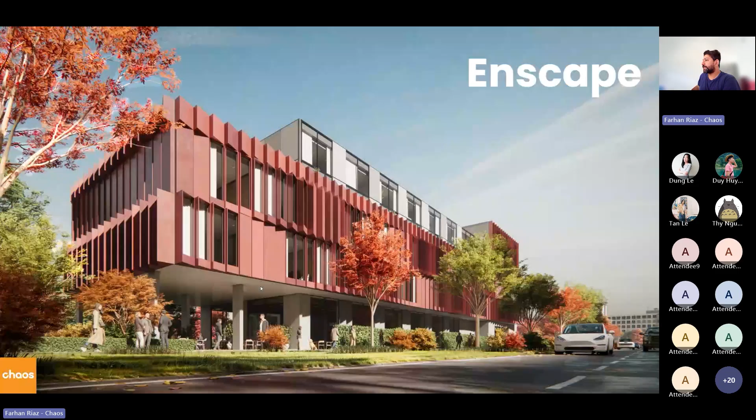So let's start. We already know what Enscape is: it's your real-time design companion. It works with all the popular CAD tools, it's easy to use, it's a plugin, and it has real-time speed. This is how a real-time workflow looks like, where whoever's working in your CAD environment could immediately see that visualization in Enscape.

With the Enscape collection, we bring in the Enscape dashboard, all of these tools, especially Veras that we're going to talk about, as well as Envision. Now, Veras is an AI-powered visualization tool that helps you quickly do a rapid exploration of your design ideas.

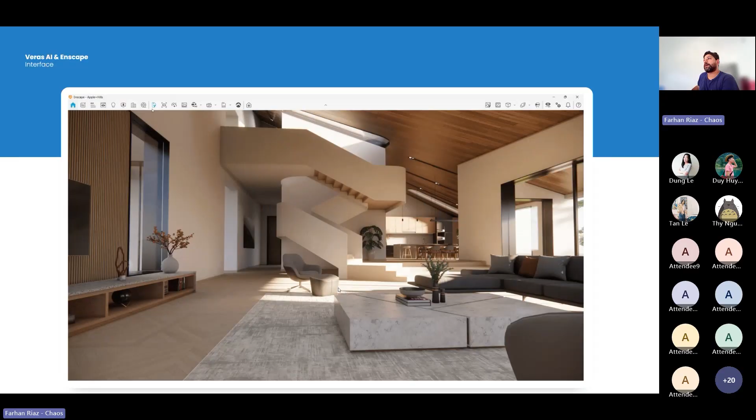Once you go inside of Enscape and click on the Veras tab, this is what you see. You have the option to move around in Enscape, and whatever is your actual view at that moment becomes the base image that Veras uses to prompt on, and then you can keep iterating on it. Now you have different source image options. By default you're using the Enscape view, but you could also use the rendered images you already created with Veras and go forward with further editing them.

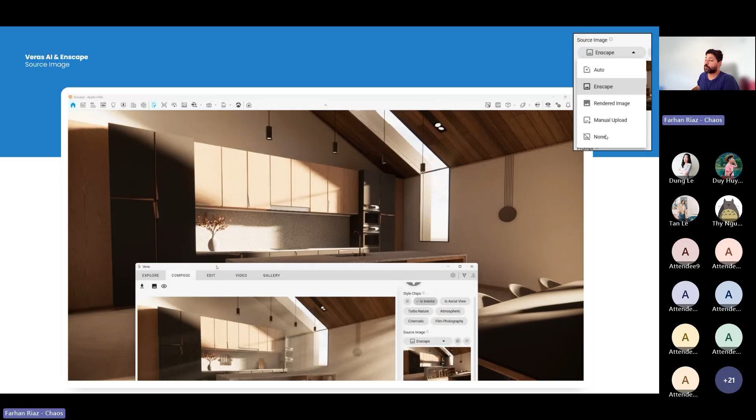Or you could also do a manual upload, which could be an image outside of your CAD, maybe a render you saved before that you want to work on. You could bring it directly inside of Veras in Enscape as a manual upload and keep working on it. You also have the option of none, which basically means you are doing text to image, if you need to do a special workflow where you need to generate something completely new.

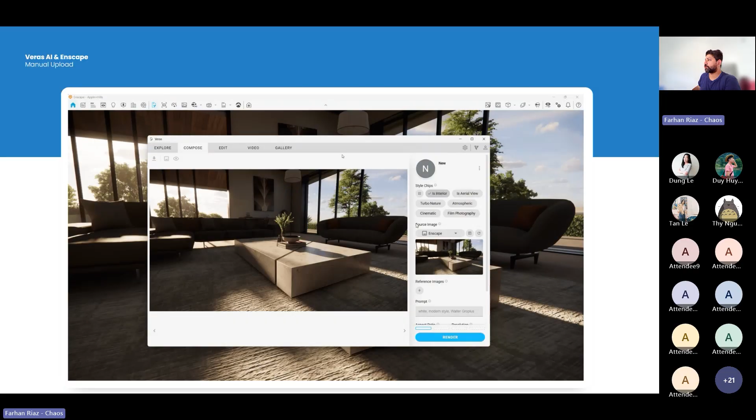We'll start with the manual upload. This is similar to how the web version works, where you just upload an image and start working on it, but now you could do it directly inside of Enscape. You click on the Veras button, choose the source as manual upload, and then drag or drop an image directly here, as you see, and it's going to show that base image, and then you could directly start prompting on it.

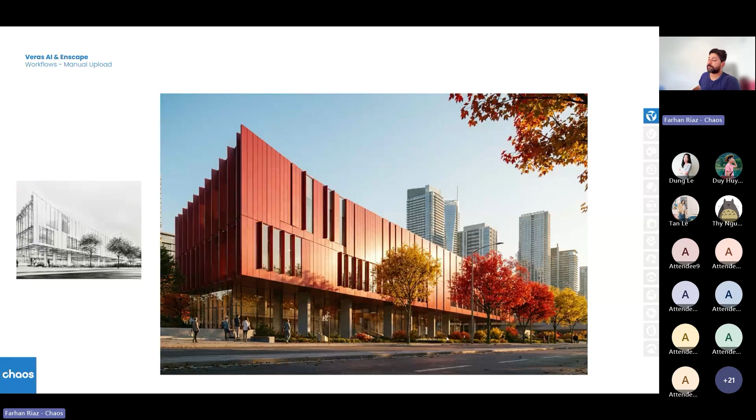Now there are different ways to use it. Whenever you start an architectural project, you might of course want to start with a sketch of your initial ideas, and that's what you could do here. You bring in a sketch to Veras, and then ask it to show how that idea could look like as a built structure. You give the prompt your ideas of the materials, the surroundings, the atmosphere, and all kinds of details for that specific design vision, and then Veras will show that image to you, how it could actually look like.

It doesn't really limit you in terms of whether it's only a built structure or an interior. It could be any design idea. It could be about form, it could be about geometry, it could be just about materials. You can test anything using Veras.

Now, Veras comes with a number of presets. These are templates that you could use immediately to quickly generate something and have a quick idea of how this could look. This could be an illustrative look, this could be something like a physical model, or it could be something very, very real where you see the realistic aspect of a built structure.

But what's important here is to understand that when you compose or generate an image, whatever prompt you give, if you like the result, you could save it as a preset and then use it for other projects as well, or even the same one. So here I have some Veras presets that come with it, but I also have my own presets, where everything I create as my own preset gets saved here, and I could always come back to it.

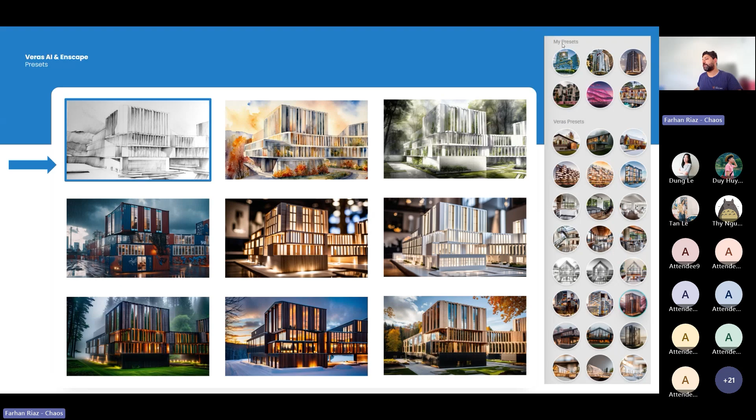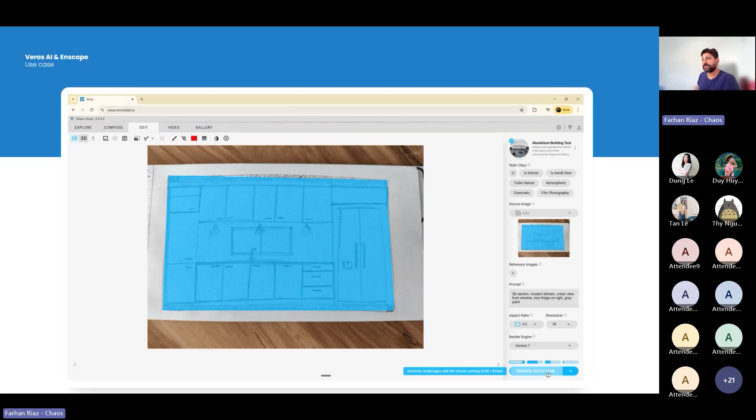So once I drop an image in the manual upload, I can select an area for the sketch and then write a prompt saying I want to see these materials, that's the object. And in a matter of seconds, Veras is going to generate at least 4 simultaneous options, and you could see different results and better understand how your design could look like.

Veras now comes with Nano Banana Pro, Nano Banana 2. Previously, we had Stable Diffusion, so everything under version 6 is Stable Diffusion. And from version 7 onwards, it's Nano Banana Pro and Nano Banana 2.

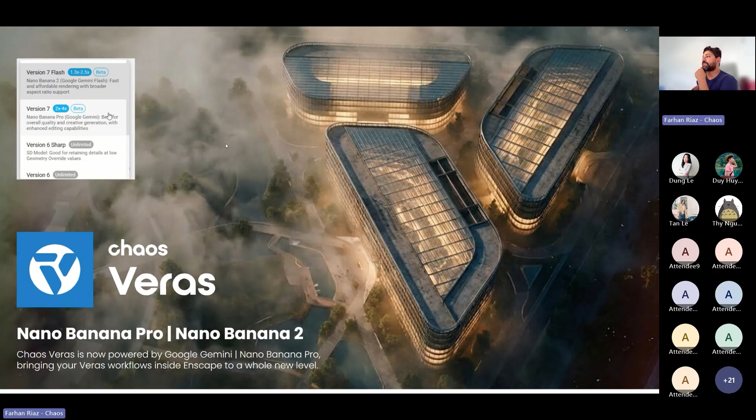This is really different compared to Stable Diffusion in the sense that it understands simple human language. So if I'm ideating and doing different smaller tasks, I could just use a simple single line, where I say something like change the chair, change this texture, or move something in the plan or image. I could do everything like that.

But if you're working in a bit more detail, where you already know what kind of output you're going to need, you can also have a very comprehensive prompt and separate that into different tasks. That's what I did here. I had this floor plan and I wanted to go directly to a visualized view, so what I did was separate different tasks in a single prompt.

I mentioned I want to generate a board to see all the areas as a final visual - the layout, the style, the details, the quality. I think what was really important for me was to provide the constraints that I don't want Veras to change the design. The windows should be where they are, the walls should be where they are - only the visual aspect should change.

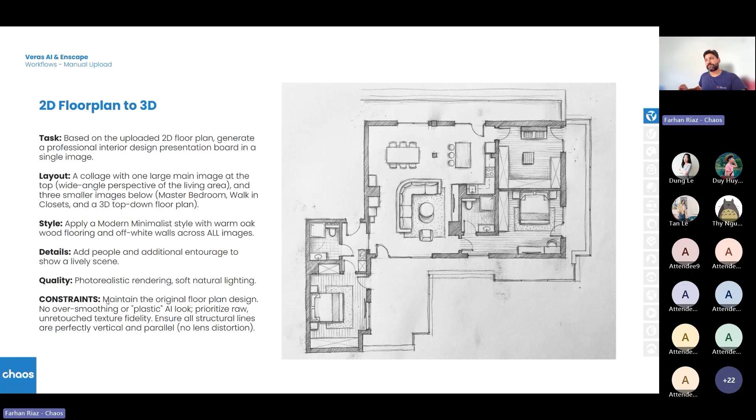And so I went from this floor plan to this in just one prompt. I'm able to immediately see how the space could look or feel and have a better understanding of how or where the design is heading.

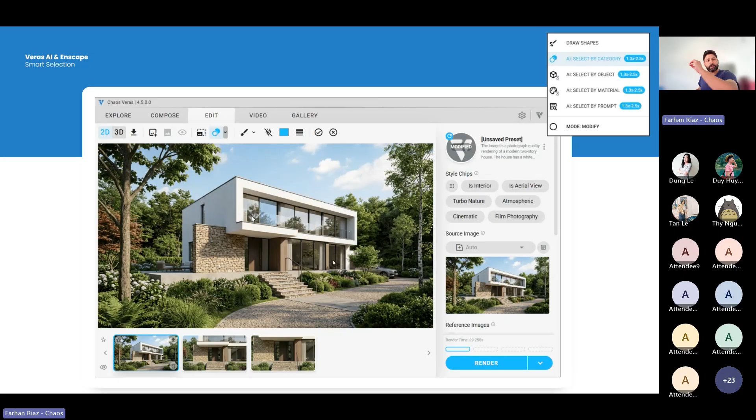Veras also has the option to segment a 2D image. That means you could segment it by different categories, different objects, and then select those different parts and prompt directly on them. You could also remove the background, and you can rotate a 2D image to see a different angle of it without having to go into 3D.

Then we have the other source, which is directly the Enscape model. This is really powerful because when you typically use AI, you have a flat image that you start with. Of course, you have options to segment it through AI, but it's not in your 3D environment. With the Enscape model, it's different - it understands the object ID, the material ID, all these depth channels. So it really understands the 3D organization, depending on how you separated it in your CAD program - Revit, SketchUp, Rhino, whatever you're using. You could pick those objects or material surfaces individually and prompt directly on them.

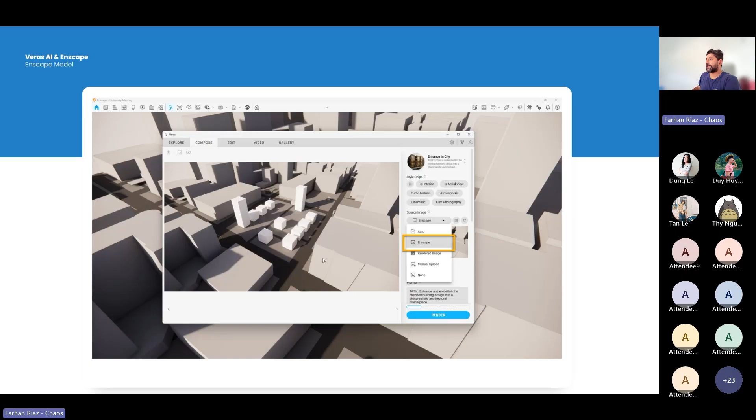Here's a first example where I changed the source to Enscape. Let's say I'm really in the early conceptual stages and I just have a volumetric form, much before I go into 3D detailing. I could ask Veras to show me how this design would look. In the prompt, I could say I want to see a university campus, with this and this in the surrounding, and these are the materials, and it will immediately show me how my idea could look.

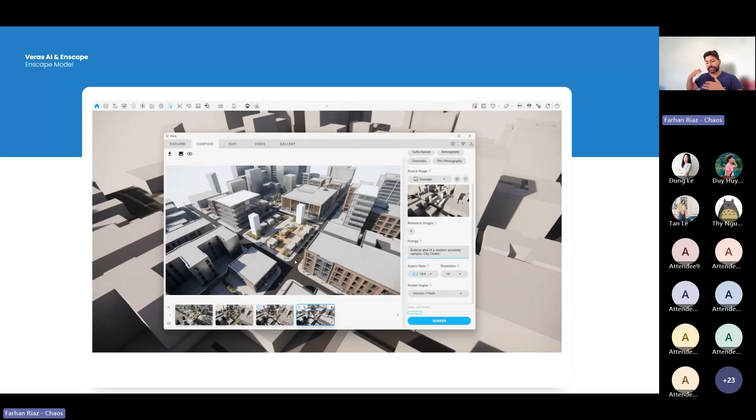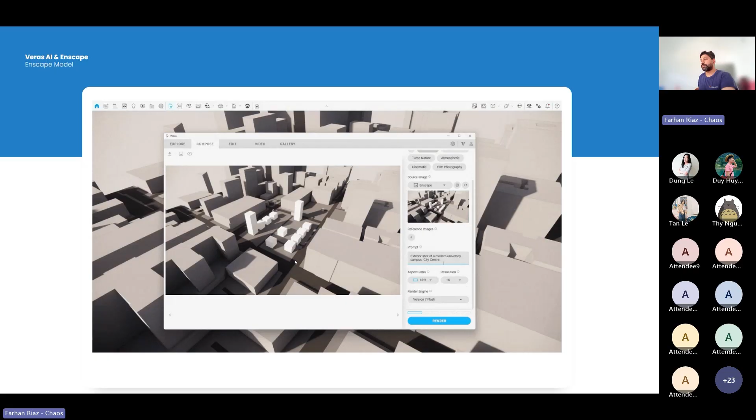So if there are some smaller or bigger decisions that I need to consider now before I spend so much time detailing that model, I'm able to make those decisions now. It really saves me a lot of time, and I can understand the design direction much better in the conceptual phase.

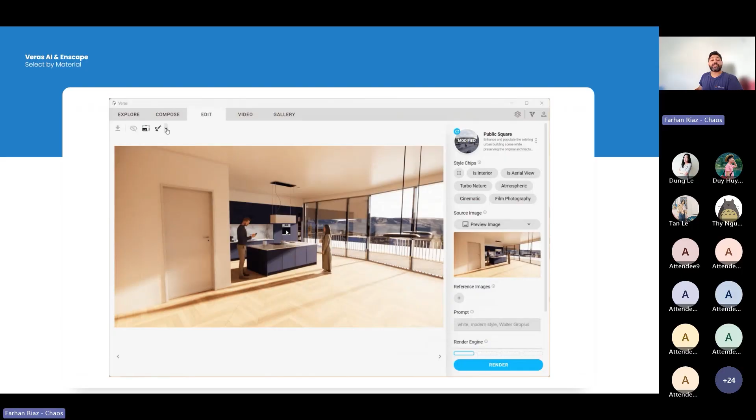But when I say it understands 3D arrangement, what I mean is you could select by material. These are the material surfaces inside your CAD, but Veras can pick them up directly, and I can say hey, change or replace this material with black ceramic tiles, for example, and it's going to change that for me. Once I click render here, you'll see it immediately creates a black ceramic tile texture.

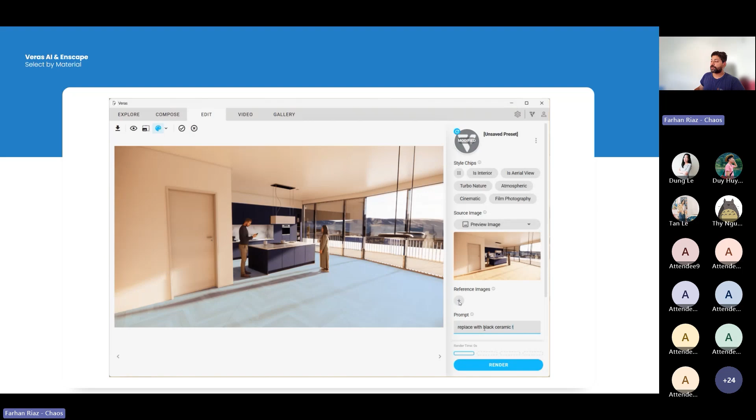Now, generally, this is exactly what I asked for, and I like the results, but there could be a scenario where even though you like the results, you maybe had something else in mind. So what you could do is use the reference image option, where you provide a reference texture or material you actually wanted to use.

It's going to replace that surface with that specific material. The same applies with select by object. So depending on how you separated your objects in your CAD, groups, components, elements, whatever you have, you could pick up these individual elements from your Enscape view. For example, here I pick this kitchen island and say I want to remove it and replace it with a dining table for 6 people, and it's going to do that for me.

And what's really nice about this combination is that it's context aware. So if there are any shadows or reflections spread because of that specific object, they are also going to be updated accordingly for that specific view.

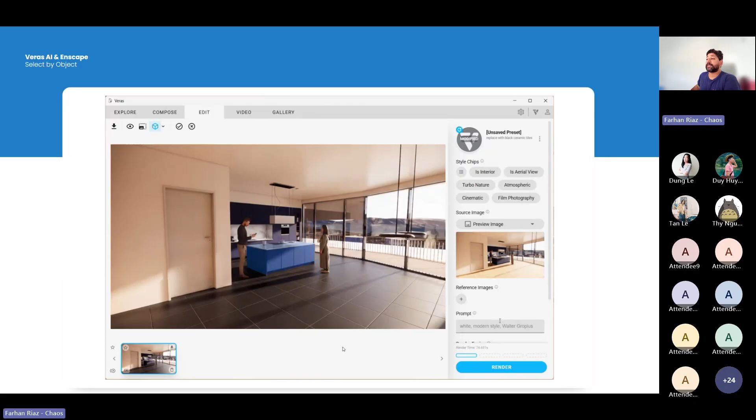And once again, there could be a scenario where you say, I like the results, but I wanted a specific object or model that I don't have a 3D asset for in my CAD software or the Enscape asset library. I could just provide an image from a manufacturer for that object, and Veras places that object directly in the generated image.

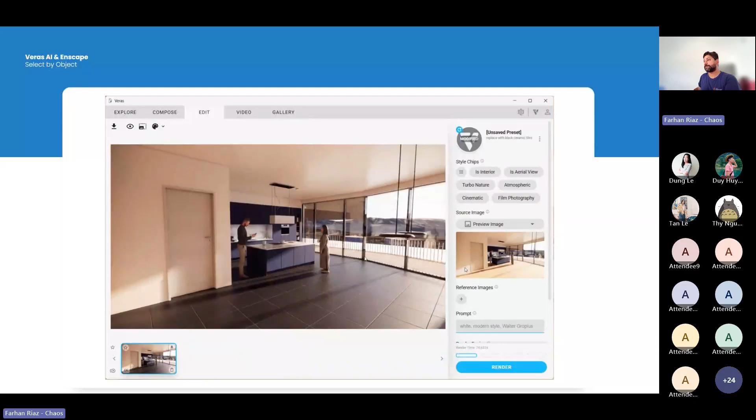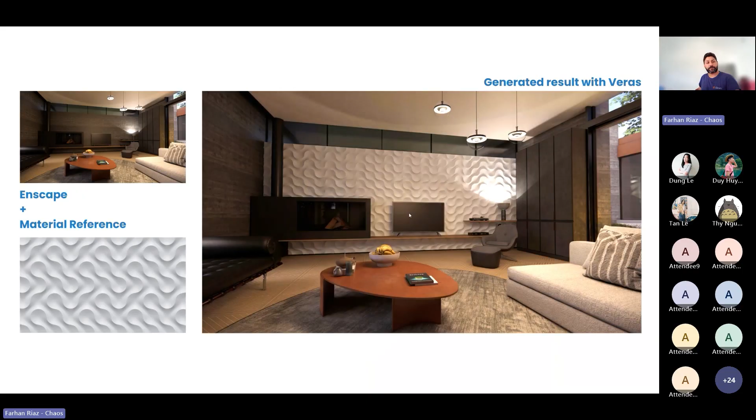So referencing with AI, just like we saw, here's your Enscape view, you provide a material reference, you choose the material surface, and it applies it for you. Same with objects: this is my Enscape view, you provide the image of the object, define the area you want to place it, and it places it for you.

But we also have other options. We have the style reference, the color reference, the design lock, and also a custom reference. Now, the style reference is pretty simple and straightforward.

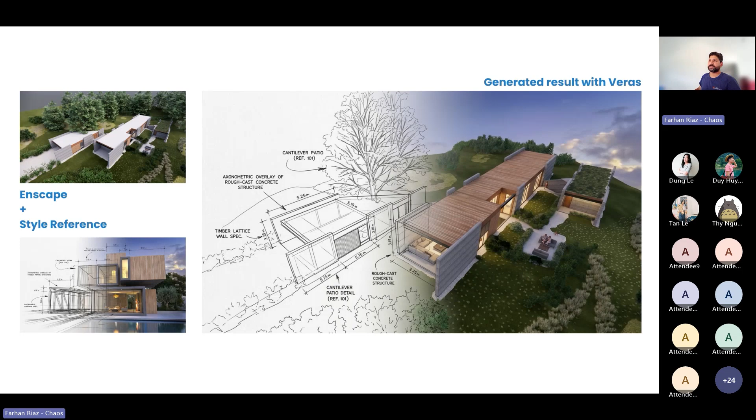This is my Enscape view. I provide a style image where I want half the render to be wireframe, half to be visualized. It uses that style and applies it to your own Enscape model.

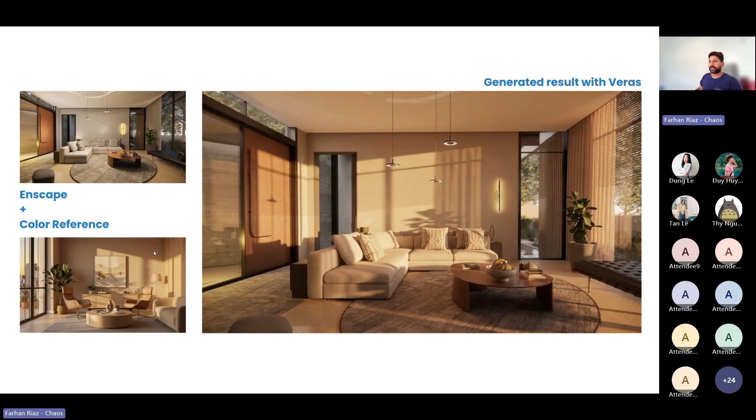Or if I have a color reference, which basically refers to lighting or the atmosphere, I use this Enscape view and provide this color reference and it applied it to my image. And if you see how accurate it is, even the light from the blinds and how it's coming here, the overall mood really brought it to exactly the type of atmosphere I wanted in the reference image.

Custom reference could be used if you're not able to find anything in a specific category that's already defined. You can choose a custom reference where you can design your own referencing style, basically. So I have 2 examples for that.

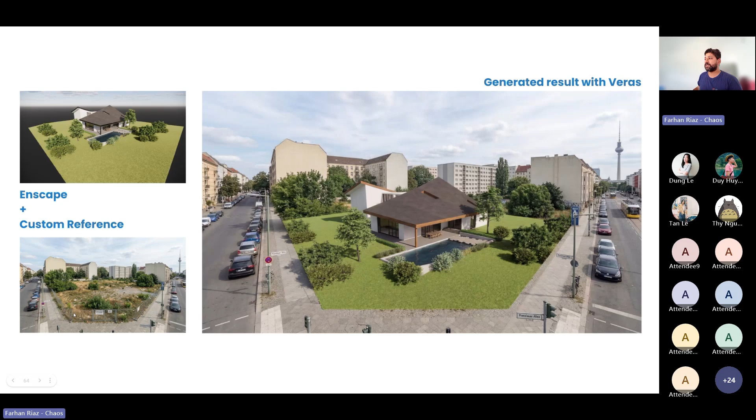The first one is where I had my Enscape model and I said, okay, I have a picture from my site, and I asked Veras to place my model inside this empty lot, and it did that for me.

Another custom reference could be mood boards. This is something I really like and use a lot. This is where, for example, you're in a design phase where you already worked on the Enscape model, you have all the textures in it, but you are talking to your customer or client and they say, okay, we want to finalize the textures, and they're slightly different from what we have been seeing or discussing throughout the design.

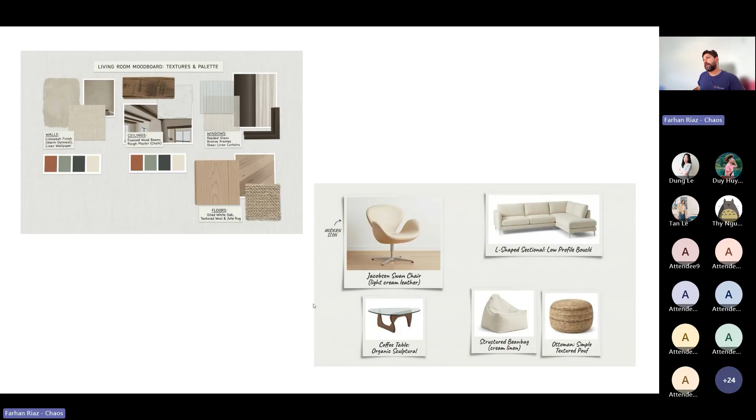But for these, I don't have an Enscape model or a model in my CAD. So I pasted all the images onto another mood board. And then I went to Enscape and changed the visual style to line drawing or sketch mode, where you don't see the textures, just the line. So I don't have to remove them, but I still have a base image where I have the space.

And then I applied the custom reference where I provided the first mood board and asked it to place the textures on this base image. And it immediately did that for me in a single prompt.

And then I provided the second mood board and asked it to place all the objects, and it did that for me. This is really fast, really quick. You could immediately get there from even a hand sketch, for example. But I wanted to test it further.

So I used the video feature in Veras to create a quick video to see how this space would actually feel. I was curious whether, if there's someone walking in the space or interacting with the elements, that would give me a better idea. So I created those, and maybe this is a good point to talk about Veras video.

Veras has a built-in feature where you could generate different length videos, 5 to almost 10-second videos, based on your base image. And you could also provide a start and an ending frame.

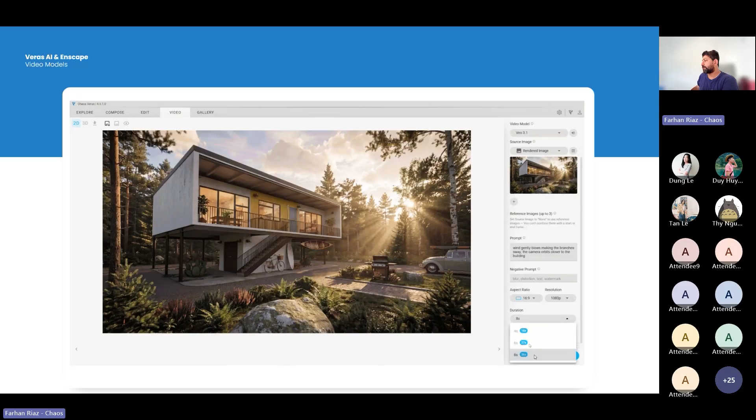Now here you have different models. We recently launched the Veo model as well, where you provide your reference image, which could be the rendered image. Then you define the quality, which could go up to 4K, and the duration. This could also go up to 8 seconds at the moment. In the future, this could be more.

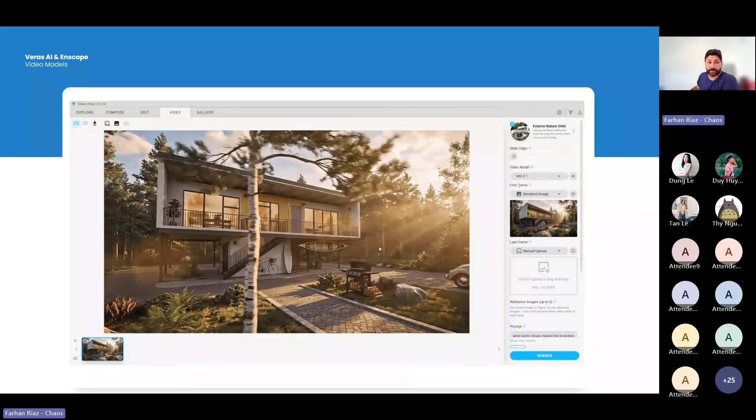So as you see here, I could quickly generate a video, and it shows me the spatial experience of the actual space. Now this could be you animating the objects in your CAD view or your Enscape view.

This could be an empty frame when somebody just enters and interacts with the space. It could also be weather or season changes, movement of some sort, people just sitting and talking, or something very illustrative, where the idea is not really the realistic aspect of it, but more the concept behind the design.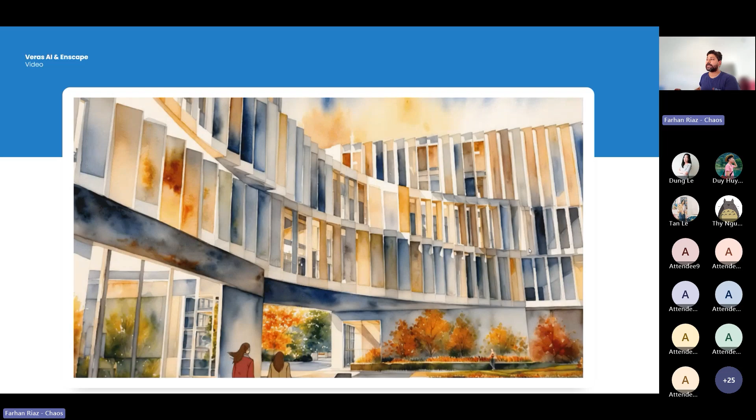We also have a combine feature directly inside Veras. That means you could create a number of videos and then combine them directly inside of Veras.

Now, if you need some sort of continuity, you could always take the last frame of the first video and use it as the first frame for the second video, and keep going forward like this to have a bunch of videos, then combine them directly inside Veras to have a longer video to showcase to your clients or customers.

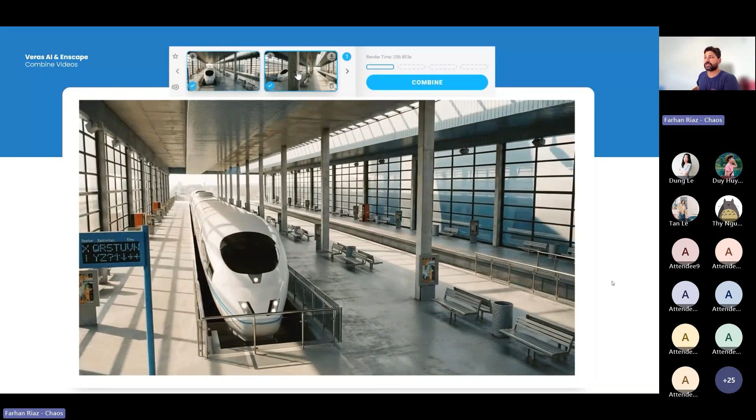Veras also has a gallery. Anything you ever create with Veras is saved in your gallery. You could always come back to it, and you could always push it back to your workspace as well. And you could share it with anyone who has a Veras account, and they will be able to see those images directly inside of their Veras account as well.

Like I said, there's also a web version which uses a manual upload. Just like you manually upload in Enscape, you could just use the web version to upload that. And you have access to your gallery in all of these versions. There are three versions or platforms: the Enscape platform, the web version, and then you also have the CAD version, which is installed as a plugin directly inside your CAD.

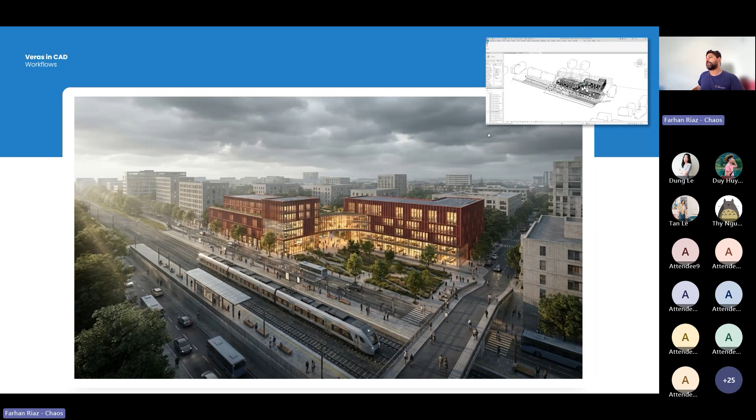So it works for Revit, SketchUp, ArchiCAD, Rhino, Vectorworks, as well as Forma. And in this case, it uses your CAD view. As you see, this is the Revit viewport here. And then you could prompt directly on it and create these beautiful visuals, and ideate and iterate on it.

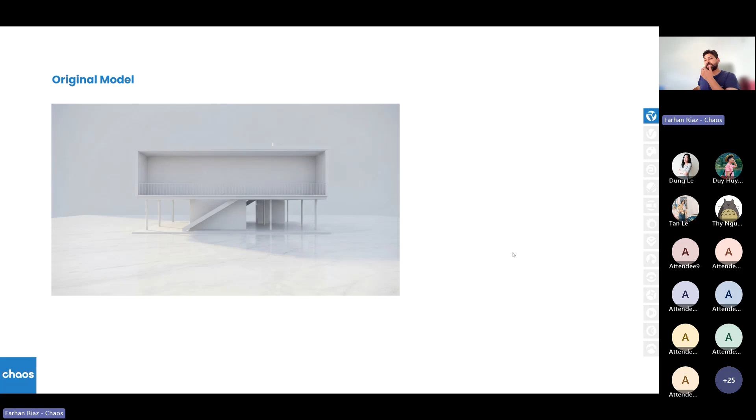Now these are the key features of Veras. There are different workflows on how people use it, but I just wanted to show how it is mapped throughout different design phases. For example, if you're using just your initial idea, which is perhaps a whitewash model, you could start with that. And then you could ask Veras to use that Enscape whitewash model and generate something to quickly ideate and see how it could look.

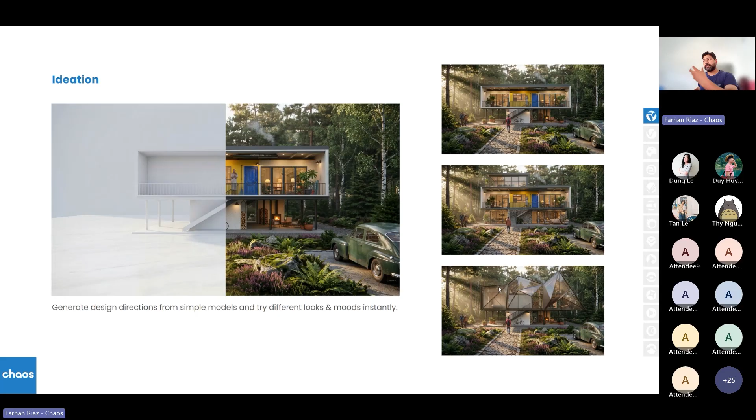And then you could see different ideas. Maybe it's an elevated building, maybe it has 3 floors, or maybe you're testing ideas on the envelope of the building. You could immediately test it using Veras and see how it looks. You could also be in the iteration phase where you already have the design, but the customer or the client asks you to change something.

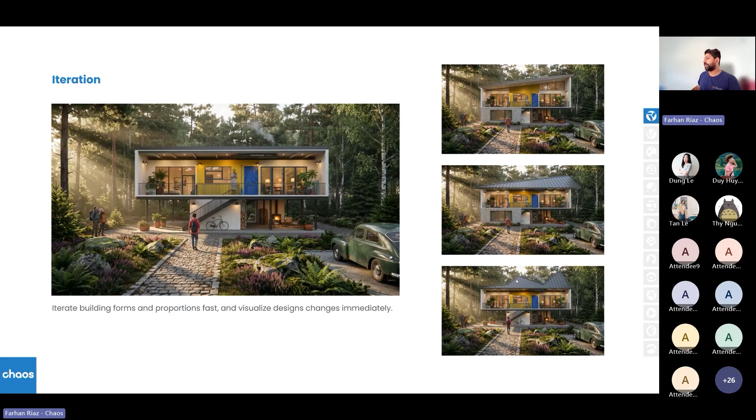For example, in this case, they asked me to change the roof, have some skylights, maybe increase the height. And then I have different options here on testing how the roof could be increased and how different ideas for that could look like.

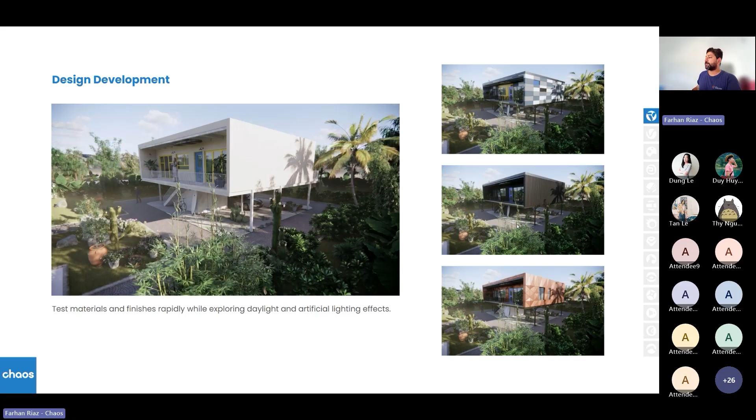In terms of design development, if you are in a very detailed design phase and you want to quickly test something like materials on the facade, and you have these different materials from the manufacturer, in terms of having it discussed with your customer, you could test them using just those textures and applying them through Veras before you actually apply it to your 3D model.

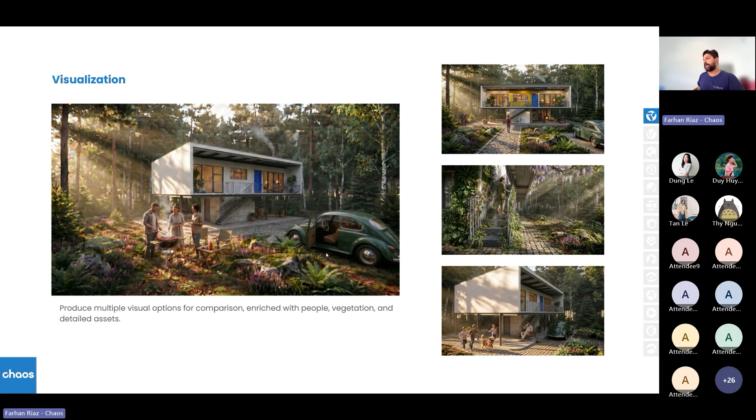And then, of course, visualization itself, you do create everything with Enscape, but some of the aspects that you want to add quickly, maybe it's the background, maybe it's those people, or maybe it's just changing some kind of visual elements like light, you could quickly do that with Veras.

And of course, in post-editing, if you've already done everything and you want to really just enhance your renders, you could do those with Veras as well.

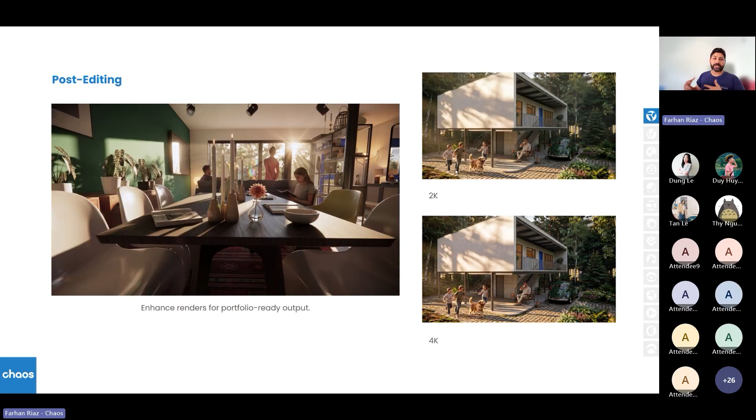You could also change the quality from 2K to 4K. When you were in the testing phase, you were using 2K quality, which you could choose inside of Veras. And then in the final ones, you could go to 4K and make it even higher in quality. So this is how it looks like. You can use it pretty much in every design phase. It depends on what your individual workflow is, but ideation, iteration, design development, visualization, presentation for videos and stuff, and then post editing as well.

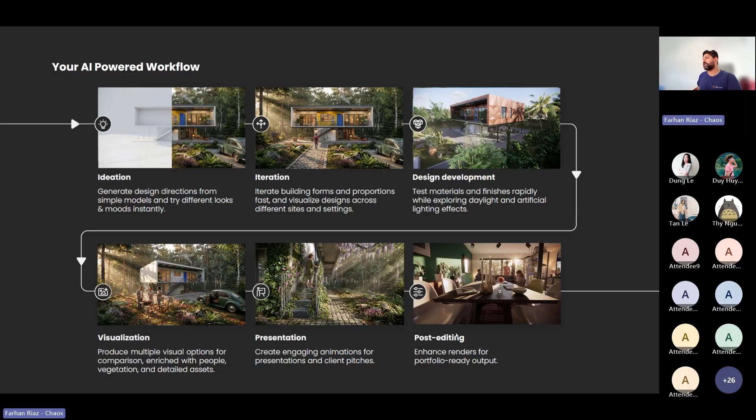I also wanted to highlight a little bit the idea of prompting itself. This is a very much asked question, how to prompt or what is the proper way to prompt. But I think it really depends on what you're trying to achieve. I'll give you a few examples.

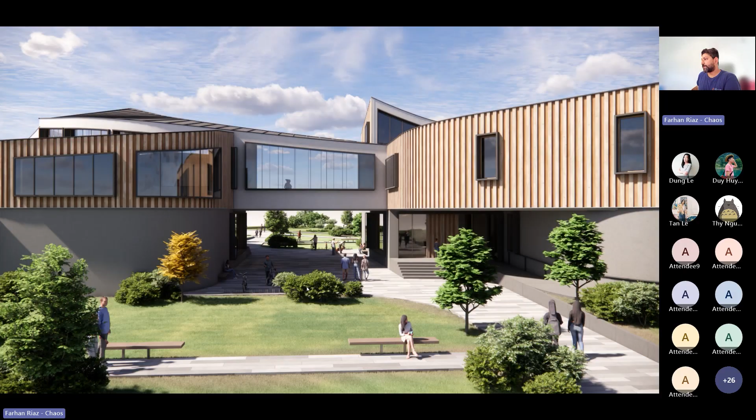So for example, this is my Enscape view, and I say, okay, change the material on the wooden facade to colored vertical strips. And then I give a line break because now I'm talking about something else, and I try to break everything that's a different task, even if it's within the single prompt. And in the second part, I say, okay, add some swings and other outdoor play objects and some kids playing in that green space. Now, I didn't specify which green space I'm talking about. It could be this, it could be that, but I mentioned it. And so based on the information I give, this is what it creates, right?

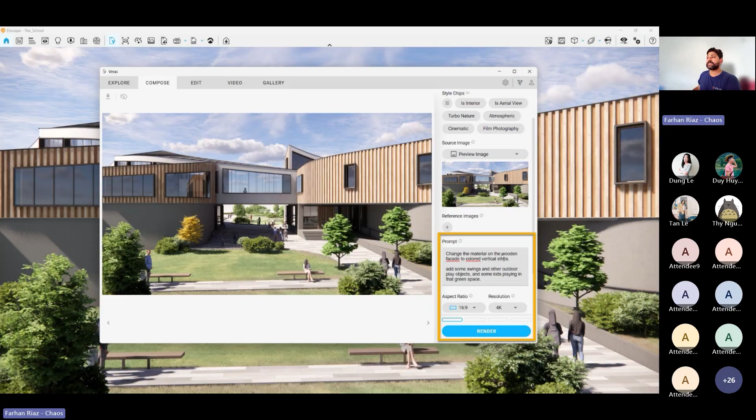I do get the vertical strips on the facade, different colored. I get a play area here, but it didn't add any play areas in the background because I didn't specify which area. But in the second image, you see it provided there as well. It understood that maybe it has to do both of these as well. And so in the third as well.

Now, I really think of prompting as somebody who's working with you. So for example, if you're working in an office and you are working on a design, but you want to hand it over to a colleague to do something for you. So AI is for me that colleague, and they will do exactly based on what information you provide. So if I'm able to explain to my colleague that, this is what you have to do, that's how you should treat prompting, where you have to explain exactly what you want it to do. And based on that information, it's going to do that for you.

Because I think most of the times we miss important key information within the prompt. And then we look at the results and we're like, hey, that's missing, or this should have been like this. That's always, or mostly I would say, because of the information that you provide.

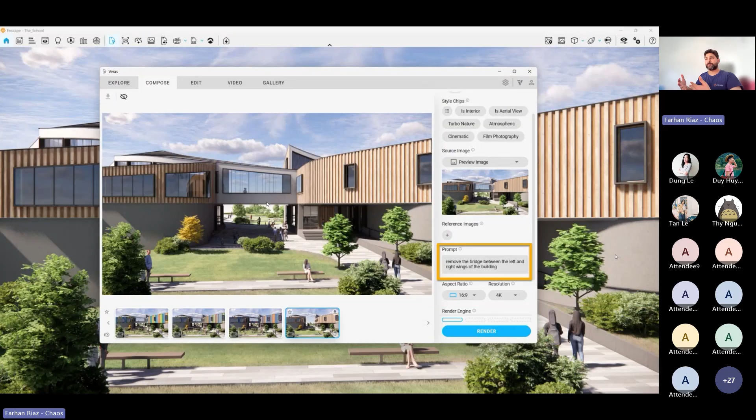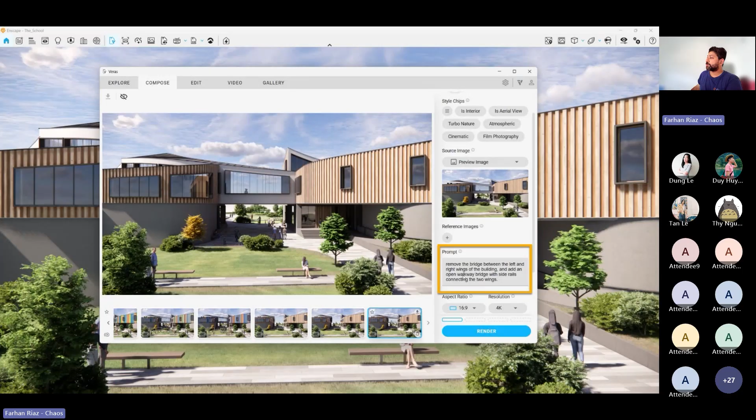I don't have to mark any specific area. I just specify in the prompt what I want to do, and because of the clarity in the prompt, it does the same for me without me having to mark an area. So I'm emphasizing that it depends on what information you give and how clear it is. Then I wanted to go a bit further and challenge myself to see how prompting is working. So I said, remove the bridge between the left and the right wings of the building and add an open walkway bridge with side rails connecting the two wings. And as you see, it did that for me.

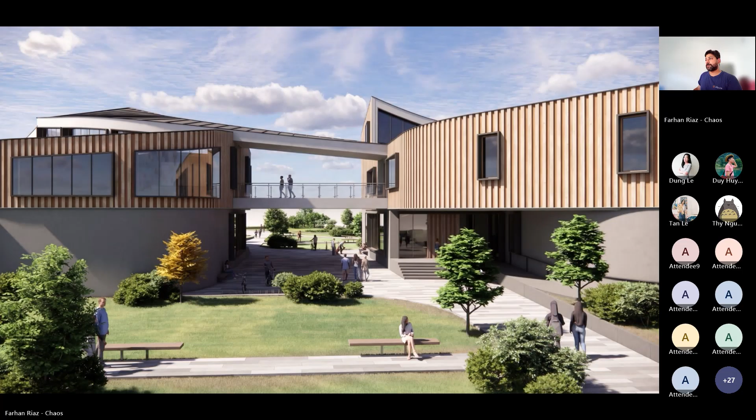Another example could be here. This is my base image, and I say, show the building in winter. Now that's the only information I gave. It really depends on how the AI interprets winter, and based on that information, it generates this image here. This is how it interpreted winter, which is fair enough. It has everything that could be defined as winter. You have the snow, you have the trees with sort of a wintry look and everything.

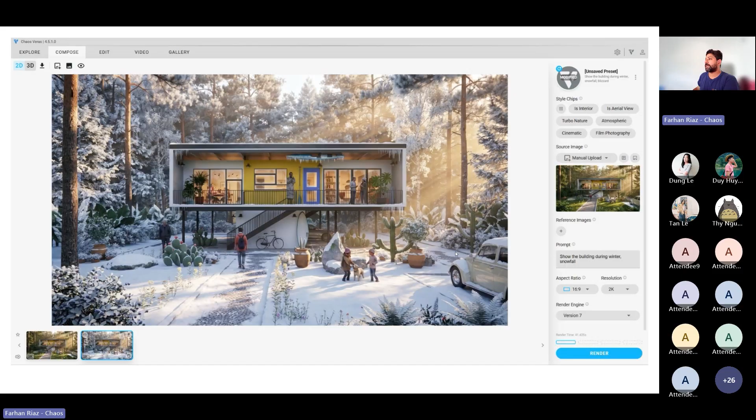But in the next prompt, I said, show the building during winter and snowfall as well. I added snowfall as a new keyword, and then it added snowfall as well. Then I said, show the building during winter, snowfall, and blizzard. In the next image, you see now it's a heavy blizzard, snowfall, and people are trying to save themselves from it. So that's what the image reflects. It really depends on what information you're giving, and that's how prompting works.

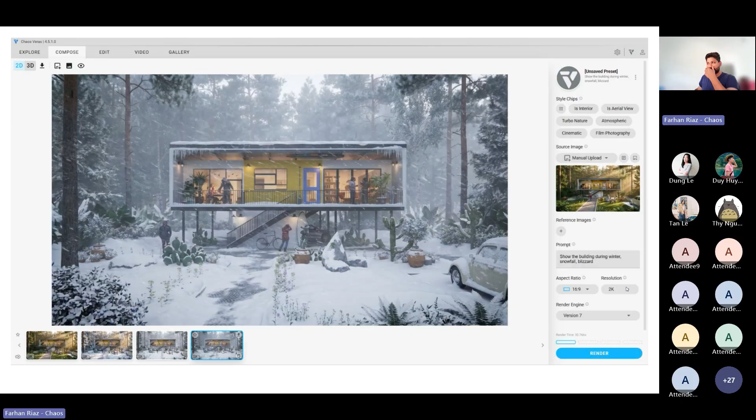This is more for, let's say, ideation, where you're still testing ideas. That's when I would go step by step, doing one part of the task, using that image, and then doing another part, continuing forward. In this case I'd probably use a lower resolution because I haven't reached my final image or visual. But if I already know what I want to achieve, for example in this case, I already knew what kind of visual I wanted to create.

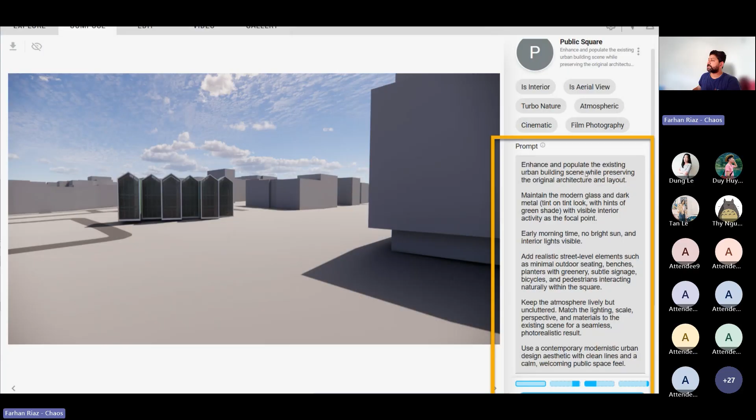So instead of going step by step with smaller prompts, I designed a very detailed prompt where I added all kinds of details in terms of what the building looks like, what the materials are, what's the time of day, what's happening in the surroundings. Based on that, I went from a single prompt to this. Then I would change a few words here and there to see different scenarios and understand how I could use that public square or how it looks in different weather.

Inside of Veras, like I said before, we have these presets, and some of these presets are basically templates for you to use. You might see this sort of structure where you have a main task, the option to enter style and art direction, components of your design, where you talk about what the main subject should be, what the setting should be, what kind of details there should be, lighting, color, and then constraints, of course. I use it a lot. In terms of constraints, this is a perfect example where I say just maintain the original design, and it maintains it for me.

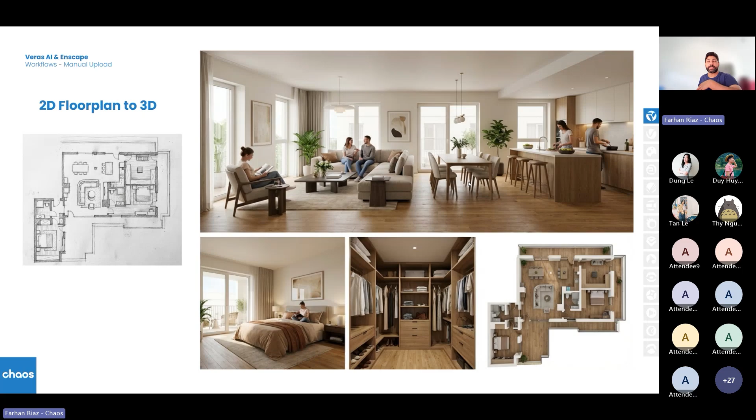So this is how it's working, and Veras works with every language. If you're using it in your own language, it's going to give you the same results as it might give you in English, French, or any other language you want to use.

Before coming towards the end of the Veras part, I wanted to talk about common pitfalls and how to avoid them. First, as we saw already, is having vague prompts. The more specific you are in your prompt, the better results you get.

You also need to differentiate between ideation and iteration. Are you ideating and testing ideas, or are you iterating because you've already chosen an idea and are working towards the final image? That also defines how you treat the prompt and how you reach a final image.

Consistency - you could lose it. If you've worked with different AI platforms before, you might notice that if you generate an image for a space from one view, and then generate another from a different view, the results are really different and look like different projects. This is what the design lock feature does in Veras - once you generate an image and like the results, you could lock the design, then apply the same settings to a different view for the same space and get similar results. So you have consistency in your generated images.

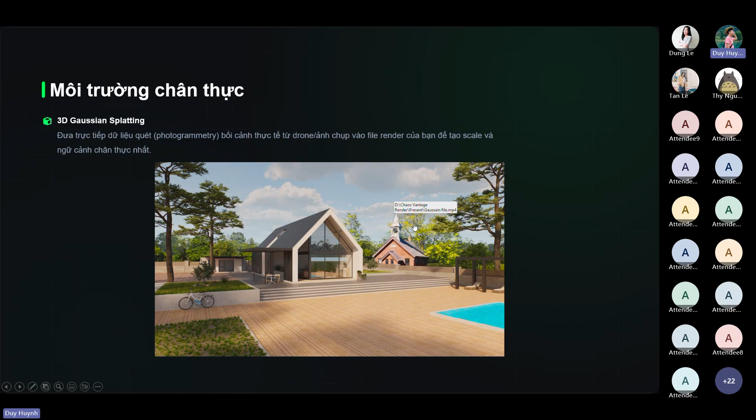Bây giờ mình sẽ cho các anh chị xem. Ví dụ mình có một mô hình 3D được quét như thế này, giống như một cái nhà thờ. Khi được quét 3D rồi, các anh chị thấy là nó bao gồm ánh sáng, vật liệu rất chi tiết như thế này.

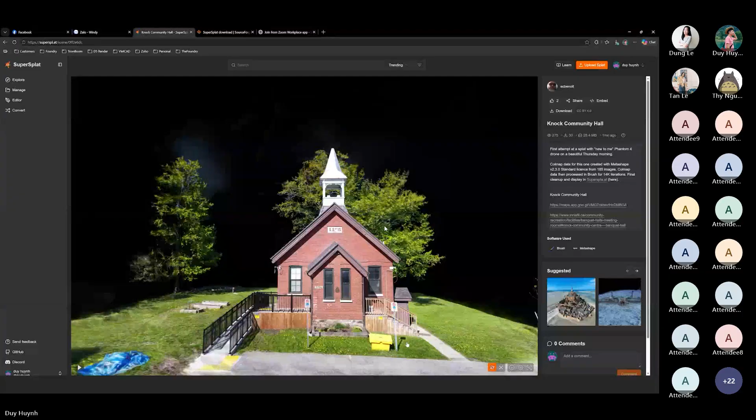Hiện tại Chaos Vantage cho phép chúng ta tạo một vật thể, và vật thể này có thể lấy được dữ liệu Gaussian Splat, và nó có thể lấy được dữ liệu từ file online mà chúng ta download về. Ví dụ như cái nhà thờ hồi nãy, mình download về xong rồi nó cho một file, thì bây giờ chúng ta sẽ mở file đó lên và để vào Chaos Vantage.

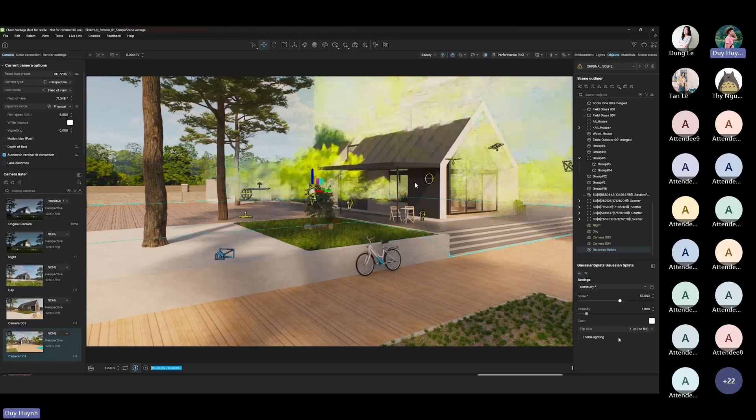Khi để vào, chúng ta có thể điều chỉnh kích thước cũng như vị trí của nó cho phù hợp với đồ án của chúng ta.

Ví dụ mình đặt nó ở vị trí này, là vị trí background thôi, và mình render thử cho anh chị xem. Chúng ta có thể thấy tuy nó là mô hình được quét bằng công nghệ, nhưng khi vào 3D thì nó thể hiện rất chính xác cùng với độ sáng, vật liệu cũng như kết cấu của công trình.

Đây là một phương án giúp chúng ta có thể đưa những vật thể trong môi trường thực tế vào mô hình 3D của chúng ta, mà không cần phải tốn thời gian để mô hình lại nó.

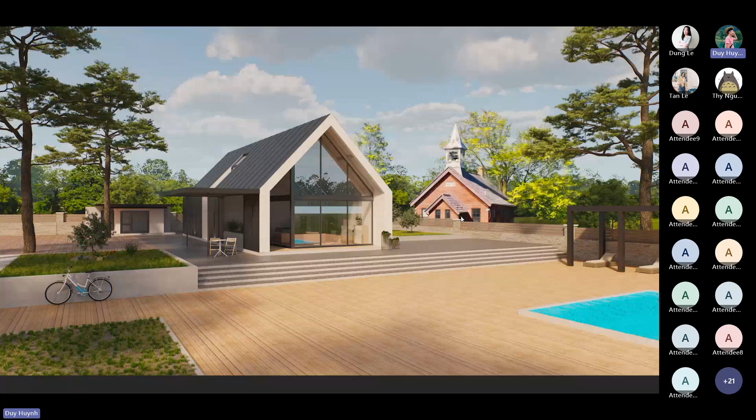Một chức năng tiếp theo là chúng ta có thể làm cho nó thành môi trường bầu trời đêm. Ở những phiên bản trước thì nó không có chức năng này, nhưng ở phiên bản hiện tại thì nó cho phép chúng ta tạo ra những khung cảnh bầu trời đêm có mặt trăng luôn, làm cho dự án của chúng ta thêm phần nghệ thuật một tí. Có những cảnh cần trình diễn đêm cho khách hàng coi thì chúng ta có thể sử dụng chức năng này.

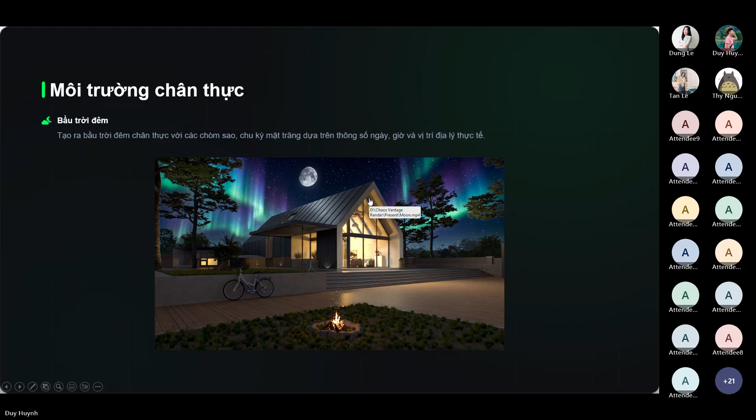Ví dụ bình thường chúng ta sẽ render cảnh ban ngày như thế này, có mặt trời. Để sử dụng được cảnh đêm, chúng ta phải sử dụng mô hình bầu trời là cái clear sky mới, đừng sử dụng cái cũ, vì cái cũ sẽ không có chức năng bầu trời đêm.

Để có mặt trăng thì chúng ta phải hạ độ cao của mặt trời xuống để chuyển thành ban đêm.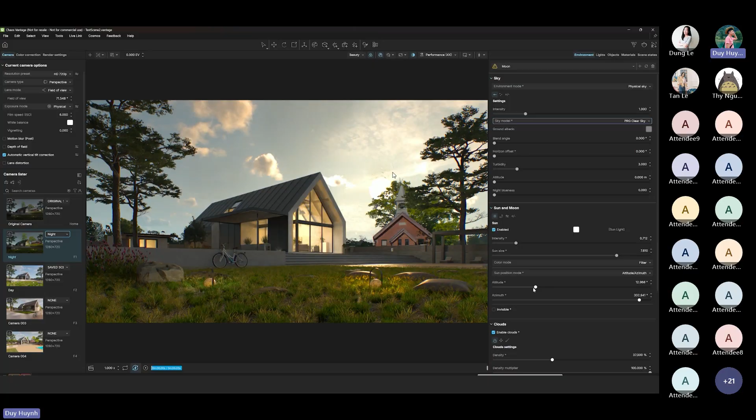Sau đó chúng ta sẽ sử dụng chức năng moon, mặt trăng. Chúng ta bật mặt trăng lên. Chúng ta có thể tùy chỉnh thông số, ví dụ như độ lớn của mặt trăng, độ sáng cũng như vị trí của mặt trăng. Ở đây ví dụ mình chỉnh vị trí của mặt trăng theo kinh độ và vĩ độ, mình có thể tùy chỉnh vị trí này để mặt trăng có vị trí phù hợp.

Cái mặt trăng này thì các anh chị có thể tùy chọn để cho nó có những hình dạng khác nhau, ví dụ như trăng tròn, trăng khuyết, và chúng ta có thể xoay cái vị trí của mặt trăng này cho phù hợp nhất.

Ví dụ chúng ta kéo cái thanh này, chúng ta sẽ có được trăng tròn hay trăng khuyết, và có thể có được kết quả như chúng ta mong muốn.

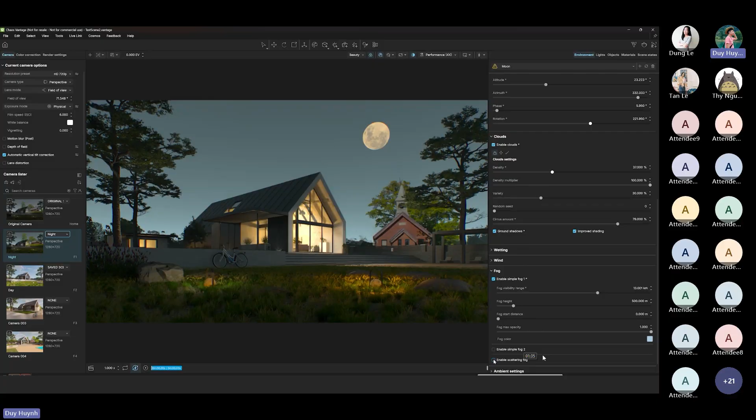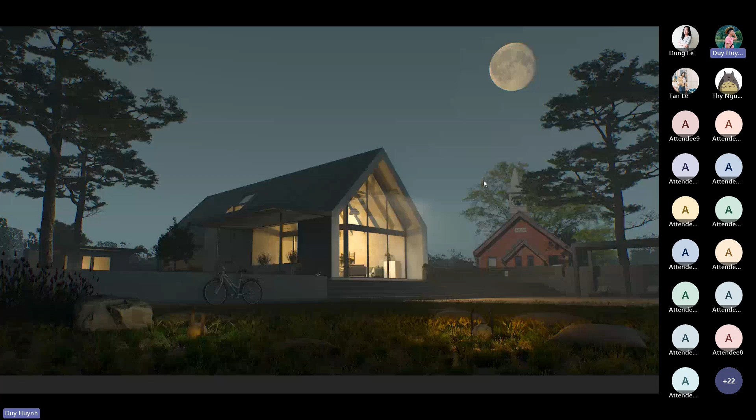Ngoài ra ở cảnh đêm này chúng ta có thể bật Enable Scattering Fog lên để tạo một hiệu ứng cho nó giống cinematic một tí. Để render ra thì chúng ta sẽ có kết quả như thế này. Đây là một trong những chức năng giúp cho các anh chị có thể diễn họa được cảnh buổi tối của những công trình cho khách hàng xem.

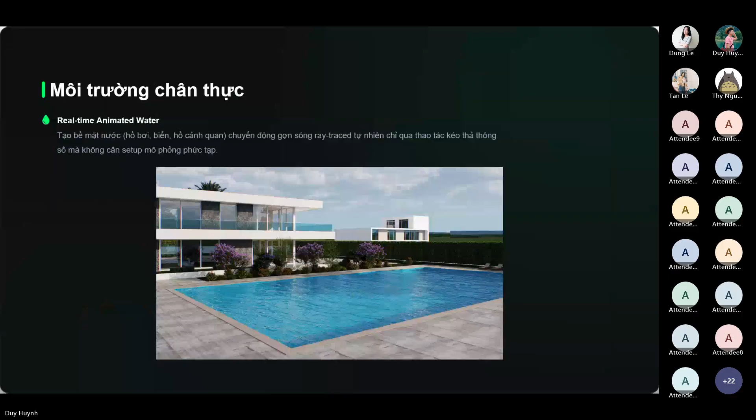Một chức năng hay tiếp theo nữa là nó cho phép chúng ta tạo ra một tấm plane, và tấm plane này có thể thể hiện chất liệu giống như nước. Trước giờ khi muốn làm những cảnh giống như hồ bơi có nước chuyển động, chúng ta phải làm thủ công, tạo một tấm plane, rồi phải làm những cái bump map để cho nó có độ gợn sóng giống như hồ bơi. Làm như vậy thì hơi bị cực.

Ở phiên bản mới nhất này, Chaos Vantage cung cấp cho chúng ta một tấm plane, và tấm plane này có độ chuyển động giống hệt nước luôn. Bây giờ mình sẽ show cho anh chị xem.

Đây là phương án cũ của mình, làm giống như để một tấm plane đứng yên như thế này, nó chỉ có những gợn sóng như thế này và không thể chuyển động được. Chúng ta có thể bỏ nó và chuyển sang tính năng water plane. Như các anh chị thấy, nó vẫn là một tấm plane, nhưng có thể chuyển động giống như nước được.

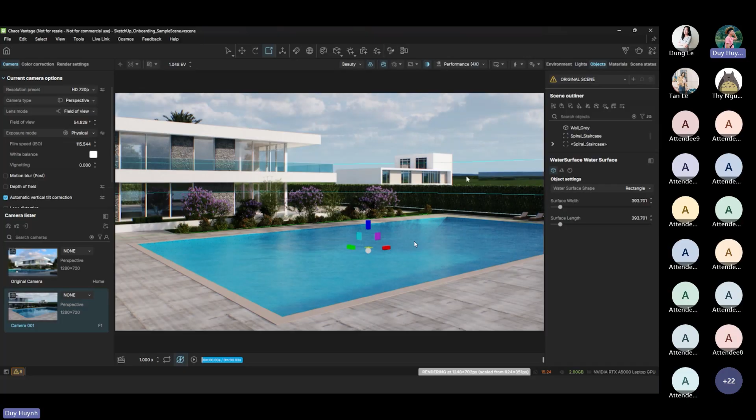Rất là nhanh chóng chúng ta có thể tạo ra được mặt nước của hồ bơi, có nước chuyển động như thế này, có những gợn sóng.

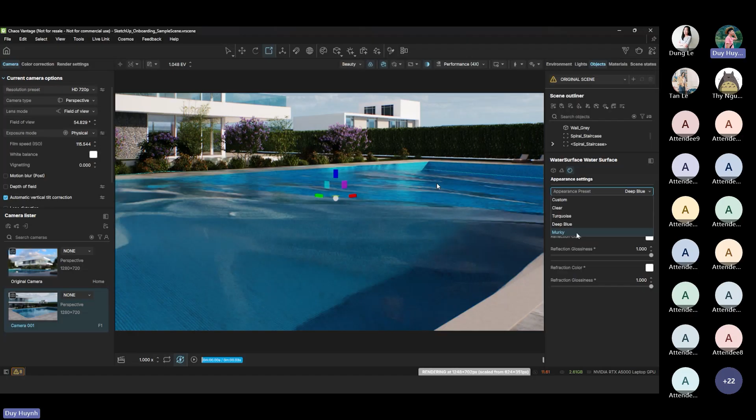Tấm plane này chúng ta có thể tùy chọn những thông số, ví dụ như mức độ sóng, chúng ta có thể chọn mức độ sóng của hồ bơi, của hồ ngoài tự nhiên hoặc là biển, và tinh chỉnh được những giá trị đó. Ngoài ra chúng ta có thể chọn màu của nước, ví dụ muốn màu đục hay màu trong, rồi tùy chọn ở đây.

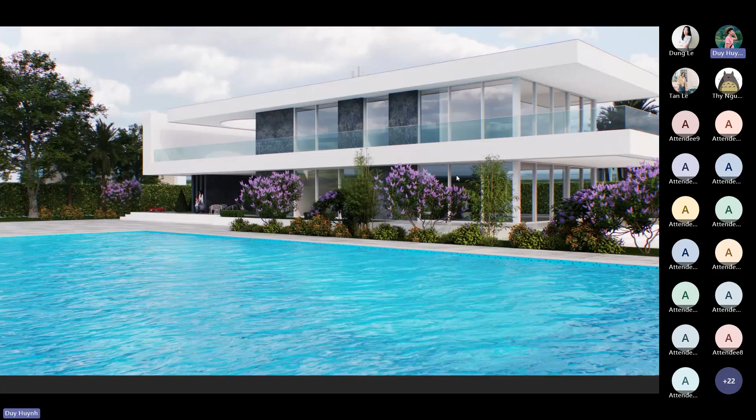Trong một thời gian rất ngắn chúng ta có thể có được kết quả để diễn họa cảnh hồ bơi rất ổn. Mình render xem thì nó sẽ ra kết quả như thế này.

Chức năng kế tiếp là chúng ta có thể tạo được những hiệu ứng khói lửa hoặc sương mù. Trước đây nếu làm những kỹ xảo như vậy, chúng ta thường dùng plugin Chaos Phoenix rồi làm những hiệu ứng đó trong Houdini hoặc Maya. Hiện tại Chaos Vantage cho chúng ta một chức năng là có thể tạo được những hiệu ứng đó ngay trong Chaos Vantage luôn.

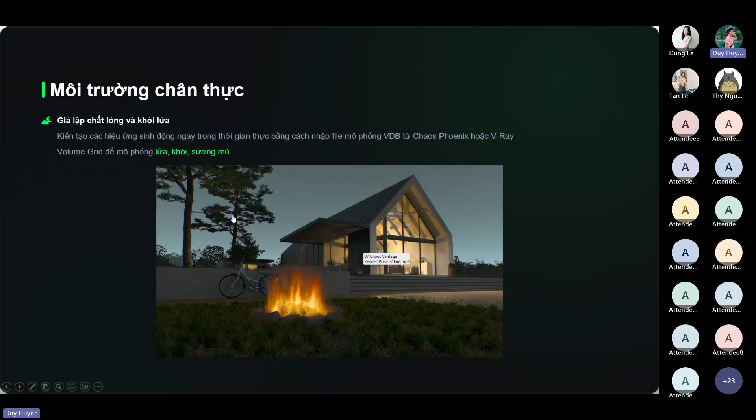Ngoài ra nó có thể đọc được những file mà chúng ta đã tạo từ Chaos Phoenix trong 3ds Max. Chúng ta tạo xong có thể đưa vào đây và nó đọc, nó có thể hiểu được. Ví dụ đây là một nơi mà chúng ta có thể đốt lửa trại ở đây.